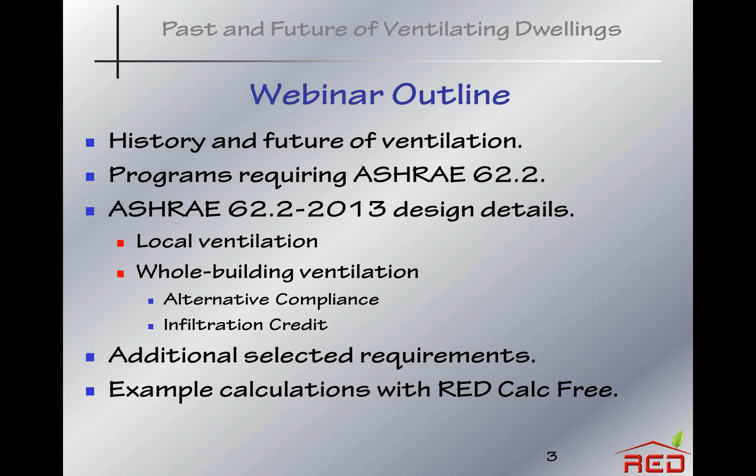A bit of history of ventilation, primarily in the United States. I love this. This is a cover, December 1931. I like it because it gives us a sense of the history, and that back then there was a great deal of controversy about ventilation.

What's the best way to ventilate? You can see by the road sign that the New York Commission was involved with this. The air conditioning industry was involved with this, developing at the time. This was a controversial issue back then, as it is today, and my guess is that it will continue to be controversial.

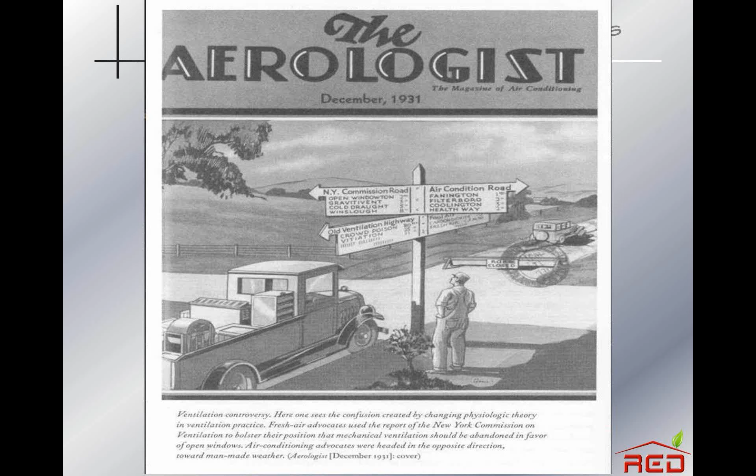Recent ventilation standards, these are all from ASHRAE, and by the way, ASHRAE stands for the American Society of Heating, Refrigerating, and Air Conditioning Engineers. The number designation given to the ventilation standard is 62. It's rather random, but that's the ventilation standard.

The 1973 version of the standard called for 5 CFM, cubic feet per minute per person, and recommended 15 to 20 cubic feet per person. In 1981, there was a continuation of 5 CFM per person.

ASHRAE 62, 1989. Now this is a significant year, as you can see from the final bullet on this slide. This is what the BPI Building Airflow Standard, the BAS, is based on. This version of the standard called for 15 CFM per person and 0.35 air changes per hour.

Some of you are probably still using this out in the field, but this will change within the next couple of months if you are following the appropriate BPI standard. I will say more about that as we move through the presentation.

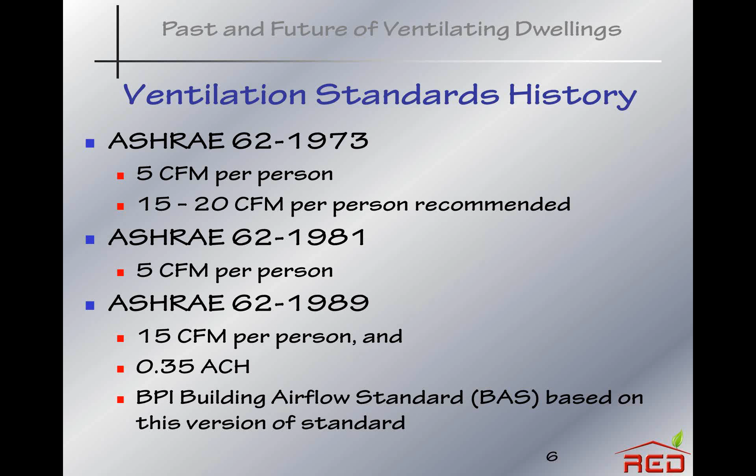There was a fairly significant change as of 2003 with the ASHRAE standard. Notice now it's 62.2. The ASHRAE numbering terminology uses a 0.2 for residential standards and a 0.1 for commercial standards.

So before 2003, it was just ASHRAE Standard 62, which covered both commercial and residential. As of 2003, the standard was split, so there's 62.1 for commercial and 62.2 for residential.

By the way, the 62.2 committee was formed in 1997 and it took quite a few years. It was a very contentious time to come up with the first version of the ASHRAE standard.

I hope you can see here the basic equation for ventilation. Residential ventilation based on the 2003 standard was 1% of the floor area plus 7.5 times the number of bedrooms plus 1. The bedrooms plus 1 is considered quite a good way to determine the number of people living in the house.

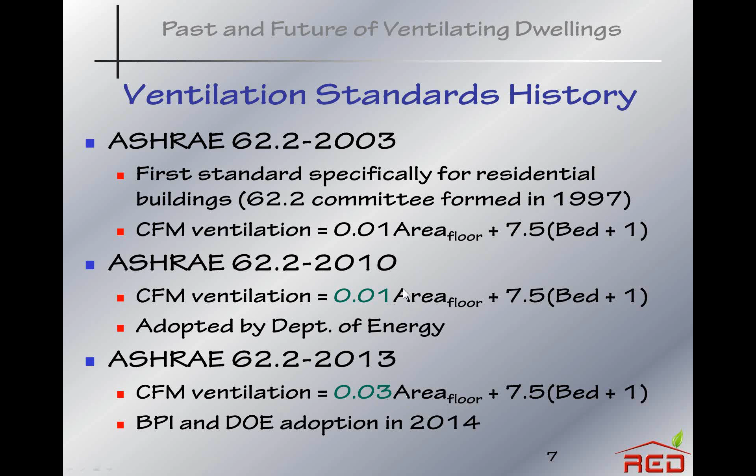The 2013 version is the most recent, and as you might be able to tell from the dates here, the ASHRAE standard is updated and reprinted in a full edition every 3 years. The next one will be 2016. The 2013 version was released just before mid-year of this year, and as you can see from the basic equation, there's a bit of a difference. Rather than 1% of the floor area, as we had with the 2010 version, it's now 3% of the floor area, because something called the default infiltration value was eliminated.

The members of the committee felt that this gave us a more level playing field for the various structures we're looking at. And you'll see in the next slide or one after that how the 2010, 2013, and 1989 standards compare.

We got another good question here. Are there studies that support the change in ventilation? And if so, are they available or could you reference them? I can't cite those studies specifically, but something the committee is doing is looking at equivalency. Another aspect is that the 62.2 standard is a continuous maintenance standard, so we must keep looking at things and making it better. I can get back to you, Bill, with an answer regarding research. I can think of one study done in California, and I can say a little bit about that on an upcoming slide because one of the major concepts is included there, but I don't recall the name of the paper - it was done at Lawrence Berkeley Laboratories.

For comparing the standards, as I mentioned a moment ago, let's look at a 2,000 square foot, two-story dwelling in Cleveland - I chose Cleveland because that's where I was born and raised - with 4 bedrooms. We'll look at it fairly tight, 1,300 CFM50 blower door test, and then we'll tighten it to 1,000 CFM50. So we're looking at it here with 2 different tightness levels. Below that, the second major bullet shows the ASHRAE whole building ventilation required.

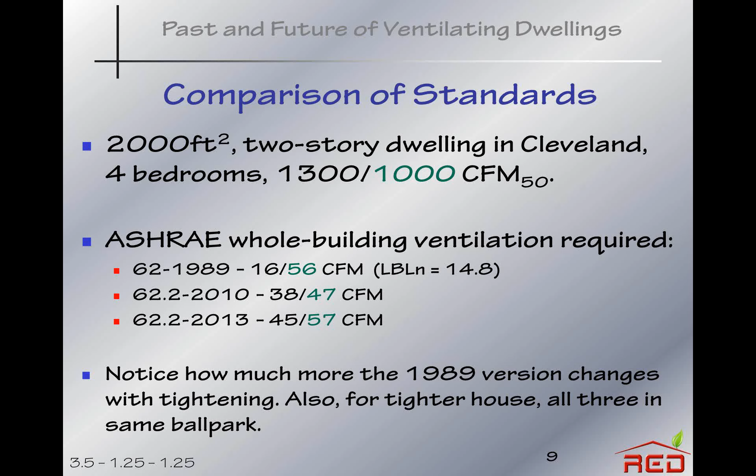For the 62-1989 standard, for a 1,300 CFM50 building, the required ventilation is 16 CFM. However, if we tighten it to 1,000 CFM50, it goes up significantly, about 3.5 times, to 56 CFM required. The 62.2-2010 standard, if we calculate that, we get 38 CFM for the 1,300 CFM50 building and 47 CFM required for the 1,000 CFM building. As we tighten the building, there's not as much of an increase - it goes up by about 25%. And the 2013 version shows 45 and 57. So the 2010 and 2013 versions are in the same ballpark, certainly - in some cases very, very close, just a few percentage points different. In other cases, they might be further apart.

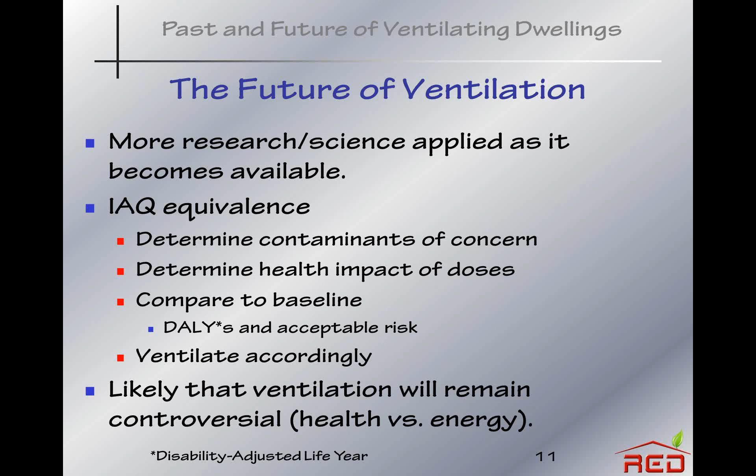This is a concept called DALYs, which stands for Disability Adjusted Life Year. If we look at a large population of people and study the indoor air quality and the way it affects them, we can see how their healthy lifetime is reduced if they're living within an environment of bad indoor air quality. It gives us the capability of quantifying the effects of good and bad indoor air quality. These studies will be done more as time goes on, and the paper I mentioned, done at Lawrence Berkeley Labs, looks at the disability adjusted life years and shows that with ventilation, people generally speaking, in the aggregate, live longer.

The indoor air quality equivalence concept is part of the 2013 standard, and that will continue in future standards. It's likely, as I've already mentioned, that ventilation will remain controversial, if for no other reason than the health versus the energy issue.

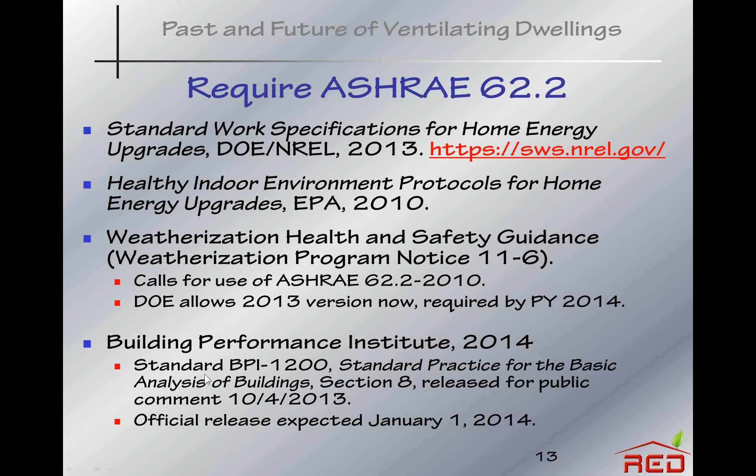EPA in 2010 published this work, Healthy Indoor Environment Protocols for Home Energy Upgrades. This includes the ASHRAE standard. There's official word from the Department of Energy that they are now requiring the 2010 version of the standard, and they will be requiring the 2013 version. Various states will have to start using that during the 2014 program year. Finally, the Building Performance Institute will, as far as I know, and this is almost official, adopt the 2013 version of the standard as of the first of next year. It is included in BPI-1200, Standard Practice for Basic Analysis of Buildings, Section 8, which was released for public comment on the 4th of this month.

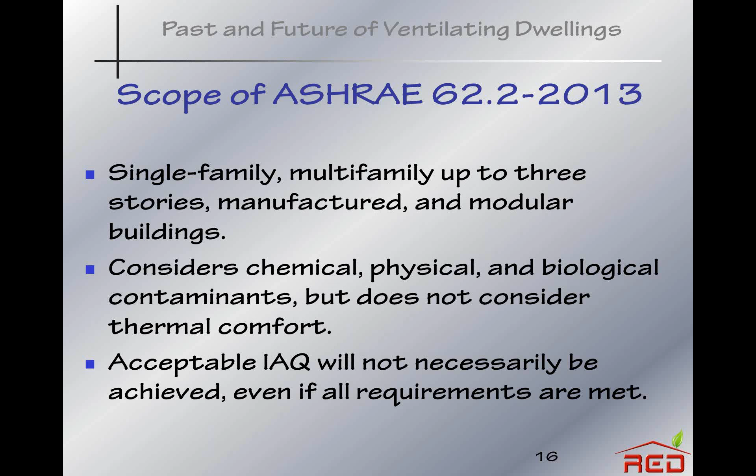It covers single-family and multifamily residences up to 3 stories above grade. If it's a 4-story building above grade, it is covered by Standard 62.1. It covers manufactured houses, mobile homes, and modular buildings. It's interesting, if you get a copy of the standard, to read the scope to see what it covers and what it does not cover.

62.2 is a continuous maintenance standard. There are many standards that ASHRAE has, but only about 20 of them are continuous maintenance standards, meaning they are always changing. As a member of the committee, this is sometimes frustrating. I sometimes get the feeling that people on the outside must think we don't know what we're doing because we keep changing the standard. We do, and I think we do know what we're doing, but there's a lot of involvement from people on the committee, and people close to the committee.

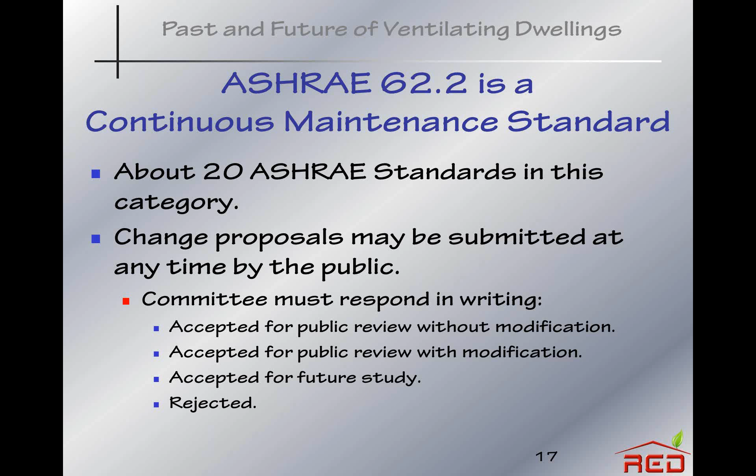Others, any of you listening, can submit a proposal, a proposed change to the standard: an addition, a change, a deletion. To do that, you go to the ASHRAE.org website, find the proposed change sheet, and submit it to the committee. The committee must review your suggested change, and then there are 4 options: we either accept it for public review without modification, we modify it, we accept it for future study, or we reject it. Those are our 4 choices when anyone submits a proposed change.

The design details of the 2013 version of the standard are what I'm going to talk about now, and I'm basing my comments on existing buildings.

First of all, it's important to keep in mind that the standard requires local ventilation. Some of you call that spot ventilation, but the word spot is nowhere in the standard. The standard uses the term local, and that is required in bathrooms and kitchens, and I will further define a bathroom very soon. Whole building ventilation is the other type of ventilation. So we have both of these required by the standard.

Local ventilation is quite easy to size properly. Whole building ventilation is more complex; the mathematics are more complex for sizing whole building ventilation. For whole building ventilation, there's the basic equation, and there's the alternative compliance part of it for existing homes, and there's an infiltration credit for existing homes also, and for new homes, but there's a limit on that.

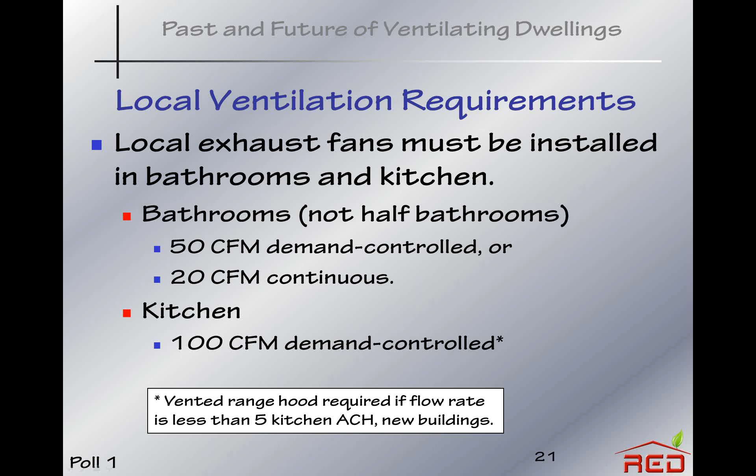Another one we've done quite a bit with in the energy field and air quality field is radon, which is a problem in many parts of the country—not all parts, but many. I would like to see BPI get into it more than they are now, but I really don't know if they will.

Okay, you can proceed. I'm going to still try ventilation. Yeah, sorry. Okay, proceed. Kitchen ventilation.

And we're starting to do studies of the capture efficiency of range hoods. There's been a lot of work done, again at Lawrence Berkeley Laboratory, on the capture efficiency of range hoods. It could be that within the next 5 to 10 years, range hoods will be rated with a capture efficiency stamped on the box. We're not there yet, but I think we are moving in that direction.

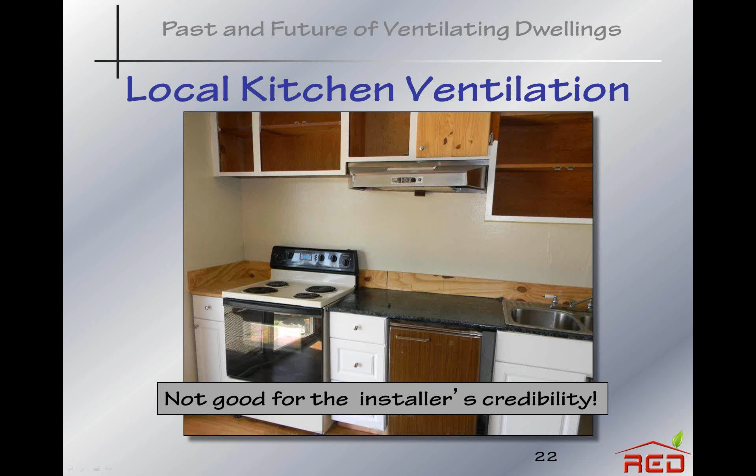And of course, the better the capture efficiency, the better the indoor air quality. As you can imagine, with a range hood, if you cook on the back burners rather than the front—say you're frying fish or something—just about any range hood will do a better job capturing those pollutants than if you cook on one of the front burners.

For existing dwellings, and I'm still talking about local ventilation in kitchens and bathrooms, a big difference between the 2007 version of the ASHRAE standard and the 2010 version is the alternative compliance path.

It was understood that it can be very expensive to go into an existing dwelling and install a kitchen range hood, bathroom fans, and a whole building fan.

So what the committee did was come up with an alternative method of complying with the local ventilation requirements, without installing or upgrading local ventilation in existing homes only.

So you may use the alternative compliance path in an existing dwelling only if there's no existing local ventilation, or if the existing local ventilation is less than the requirements of the standard—those being 50 CFM demand controlled for bathrooms and 100 CFM demand controlled in the kitchen.

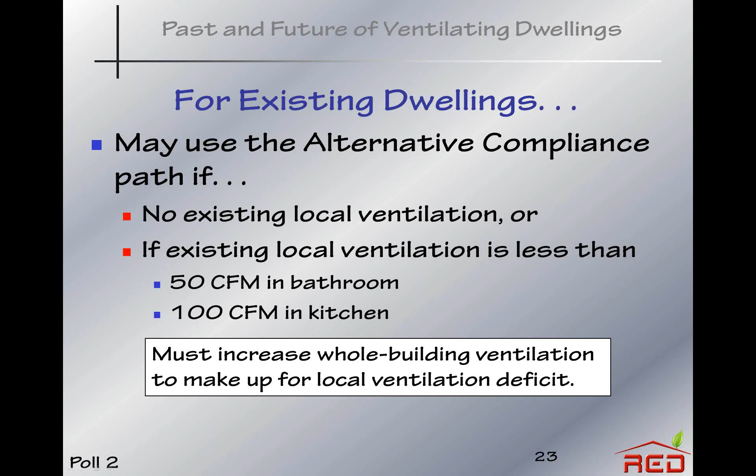Now, moving to the topic of whole building ventilation and the way this is handled in the 2013 version of the standard. Whole building ventilation has a different function than local ventilation. Whole building ventilation is to dilute the stale air in the house with fresh air from the outdoors.

There's air pollution all over a house. We carry around some of it with us on our bodies - smells, for example, carbon dioxide, other pollution, maybe from perfumes, deodorants, soaps. Furnishings can off-gas pollution, upholstered couches and chairs, carpeting and rugs. Pets generate indoor air pollution too. Whole building ventilation is intended to dilute those pollutants with fresh outdoor air.

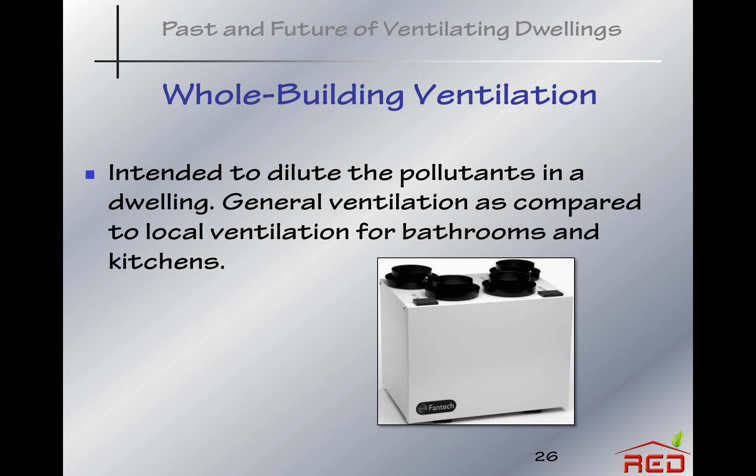The total required ventilation rate is the simple equation coming up. We add the alternative compliance supplement to that, and we subtract the infiltration credit. We get the final required mechanical ventilation rate for the whole building. We will go over that again - that slide will come up again.

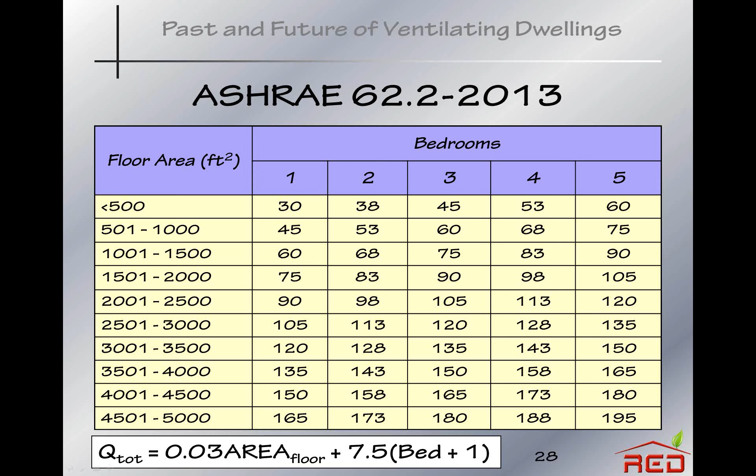This table is right out of the ASHRAE 2013 version, ASHRAE 62.2, and the equation at the bottom is the basic equation Q total. It's 3% of the floor area plus 7.5 times the number of bedrooms plus 1. I recommend when you're doing your sizing that you use this simple equation as your starting point rather than using the table. The table rounds upward in almost all cases.

The whole building ventilation requirements of the standard may be satisfied by intermittent operation. That is, the whole building fan is not required to run all the time. Indeed, it may, but it doesn't have to.

For example, let's assume you have a heat recovery ventilator, an HRV, rated at 150 CFM - that's the capacity. But the requirement for the house you're working with for whole building ventilation is 50 CFM, so that's 1/3 of an hour. So you would operate this HRV on a timer for 20 minutes out of every hour to get an average of 50 CFM. So you may handle whole building ventilation by running it intermittently.

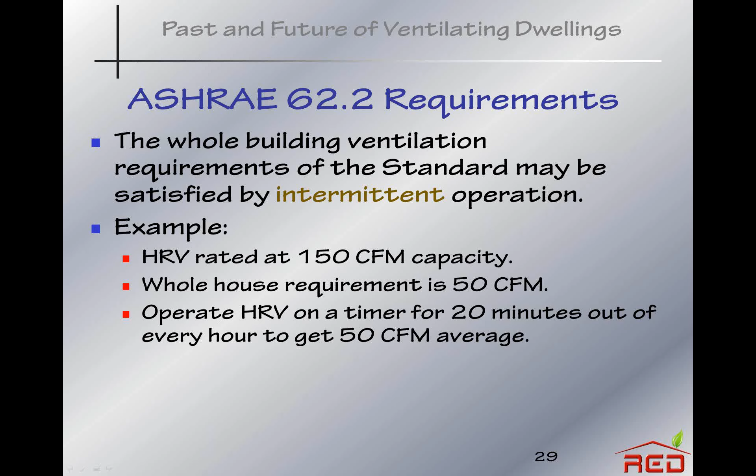And Bill, this is poll number 3 if you're ready yet. Sorry, I'm having trouble, still having trouble. I think it's a dead issue for this webinar. I apologize, okay, I'll move on then. Okay.

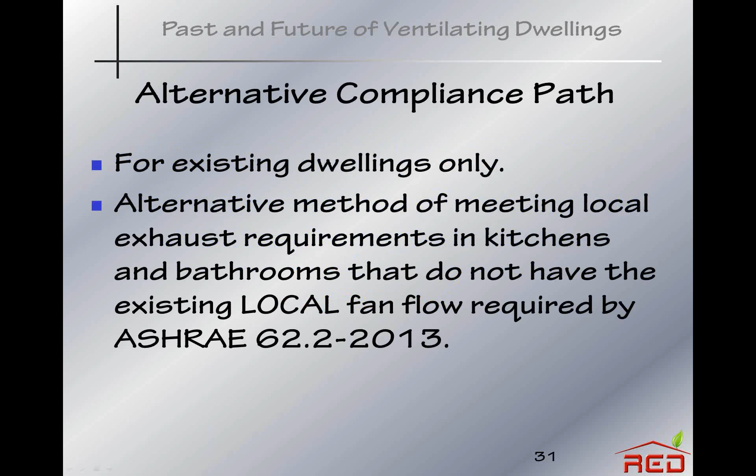Now, part of the 2010 and the 2013 versions of the standard is the alternative compliance path for existing dwellings. In both versions of the standard, this is found in Appendix A. It's for existing dwellings only - that's very important to keep in mind. And it's a way to make the standard more flexible for existing dwellings.

We'll go through this alternative compliance path. In each room where local ventilation should be, what you do is determine the deficit. We'll go through a few quick examples. If there's no fan in a bathroom, and it would be very difficult to put one in - for example, in my house, I have a very old house, and it's impossible to get ventilation in one of my bathrooms - so that bathroom has a deficit of 50.

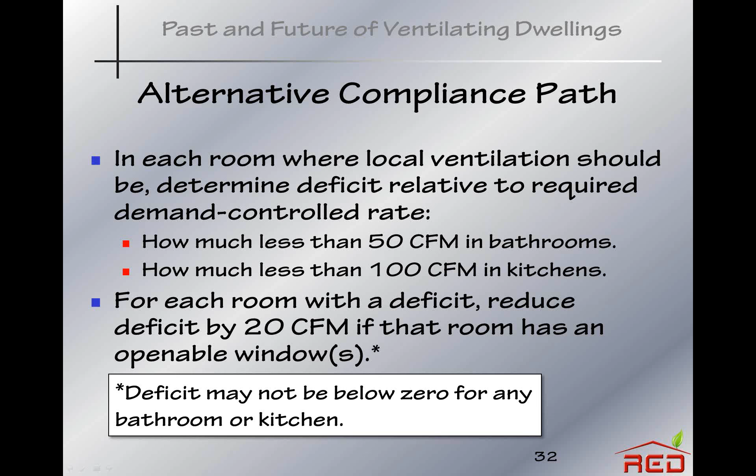Or if you go into a house and there's a fan there and you measure it - and you must measure it if you're not measuring - its actual flow rate is 37. Now you know when it comes to calculating that deficit, if the actual flow rate is 37, the deficit is 13. You do the same with the kitchen. For each bathroom or kitchen with a deficit, you can reduce the deficit by 20 CFM if that room has an openable window. It makes no difference if it has 5 openable windows or 1 - the reduction of the deficit by 20 CFM is the case. You can't take a reduction of 20 CFM for each openable window.

We'll go through this with examples. You add up all the deficits and then divide them by 4. Then you add the result to the whole building ventilation requirement. For example, if the total deficit is 100 CFM in local ventilation fans, you divide that by 4, you'd get 25.

You add that 25 CFM to the whole building ventilation requirement. For existing fans that are to be left in place, there are no sound requirements—you just keep what you have. If you're putting in new fans, there are sound requirements, which we'll look at soon. You must measure the flow of existing local fans. If you're not doing this, you better get accustomed to it if you're going to use the standard, because it is a requirement.

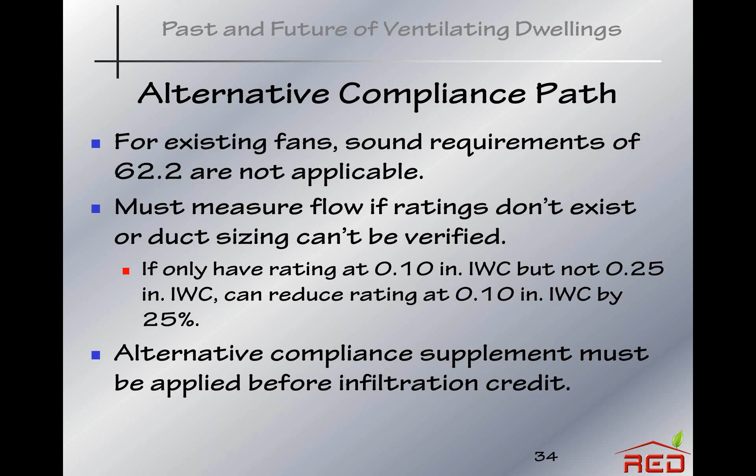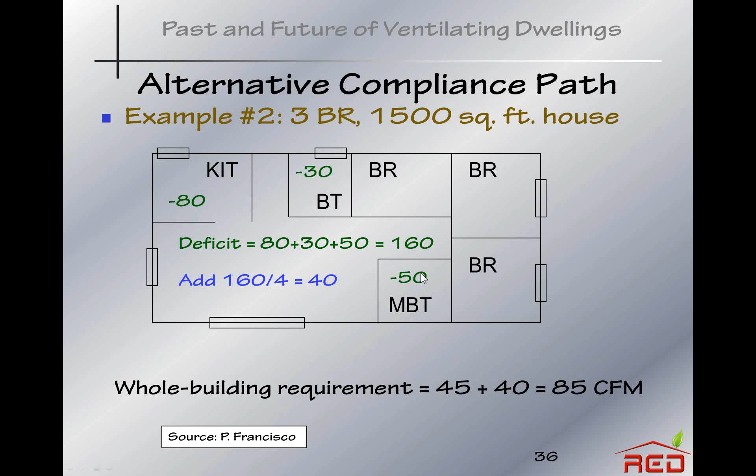Example number 2. Now we have a window in this bathroom, a window in this kitchen, a window in this bathroom, and the master bathroom remains the same. So the deficit in the kitchen is reduced by 20—it's 80. The deficit in this bathroom is reduced by 20—it's now 30. This deficit remains the same. So the total deficit is 160. We divide that by 4, we get 40. We add that to the assumed calculated whole building ventilation, and we get 85.

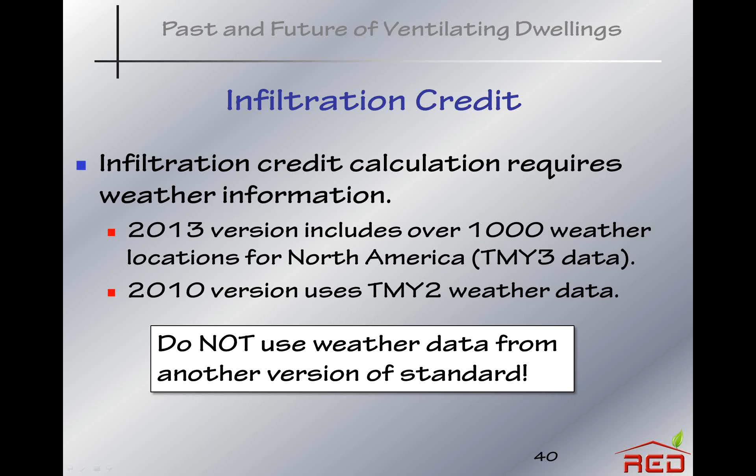There's an infiltration credit for existing and new dwellings, having to do with the tightness or looseness of the house. For the infiltration credits, you need weather factors, and something nice about the newer 2013 standard is that it includes over 1,000 weather factors. Some of you have been frustrated by the lack of weather factors—now there are 5 to 6 times more than there were with the 2010 version.

The 2013 version uses TMY3 weather data—TMY3 stands for Typical Meteorological Year 3 data. I'll show you that when we get to the RedCalc free tool.

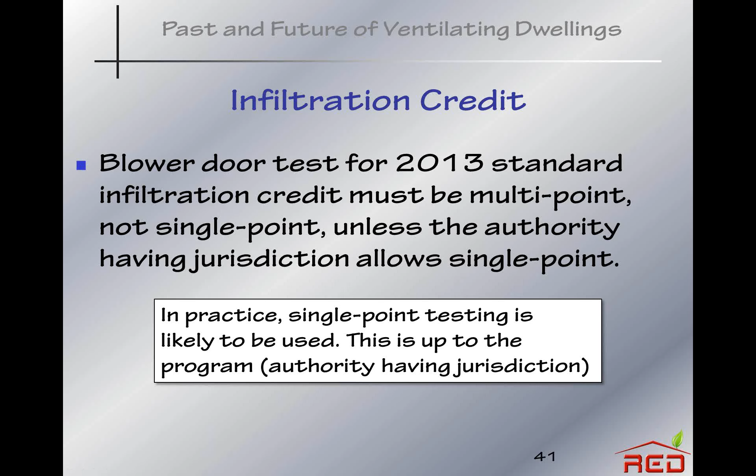To find the infiltration credits, you must do a blower door test. The standard states it must be a multi-point test, but the authority having jurisdiction may allow a single-point test. This is an issue that's a bit beyond what we have time for today, but it must be resolved. In most cases, I think people will be doing single-point tests.

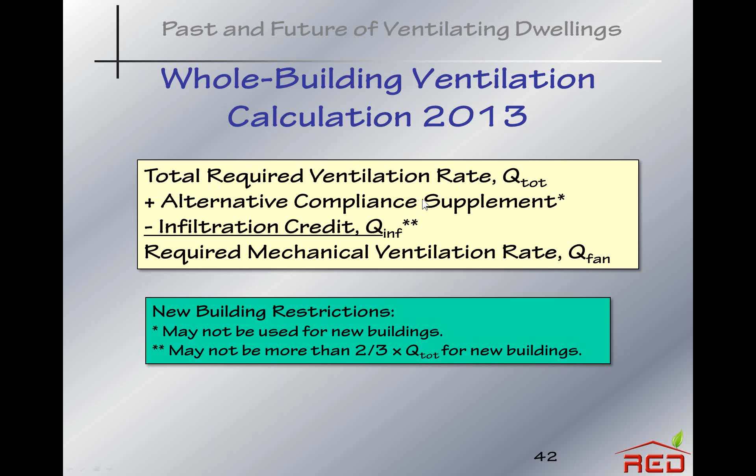You've seen this before, but this is how we calculate the whole building ventilation: the total required ventilation from the table or the simple equation, plus the alternative compliance supplement—we went over 4 examples for that—minus the infiltration credit. The math of the infiltration credit is too complex for me to show directly. Then we get the required mechanical ventilation, which is the flow rate for the whole building fan.

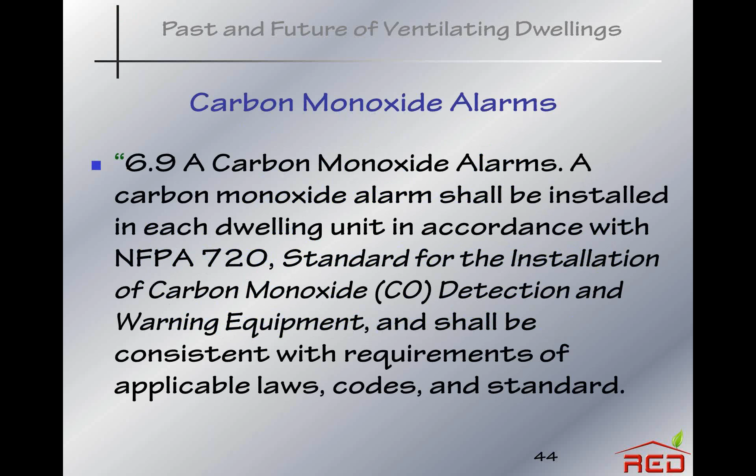Something that is added in the 2013 version of the standard is carbon monoxide alarms. Those of you in low-income weatherization working with a BPI program are already doing this most likely, so this is not new to you.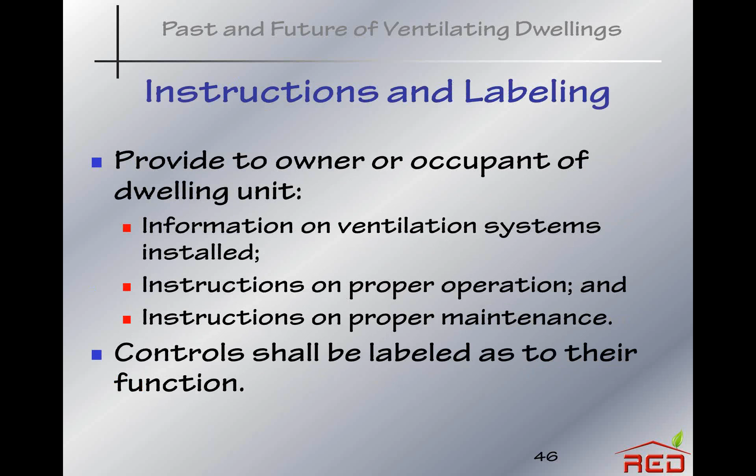Labeling and instructions is an important part of the standard. You must label the ventilation fan switch so people know what it is.

Something I think all of you have been doing with your programs is exhausting dryer air to the outdoors. This is part of the standard.

Sound ratings for fans: if you put in a new fan, either local or whole building, a new whole building fan must be 1 sone or less, and if it's a local fan, it must be 3 sones or less. If you're leaving existing fans in place, there are no sound requirements. Sone ratings can be found on most fans, but you will not find them on air handlers if you're using air handlers for ventilation, or on inline fans, which are often installed in attics. They do not have sound ratings, and that's not required.

Now we'll look at an example using the RED Calc Free software. I hope this ties the calculation procedure together for you. Before we go to the live website for that...

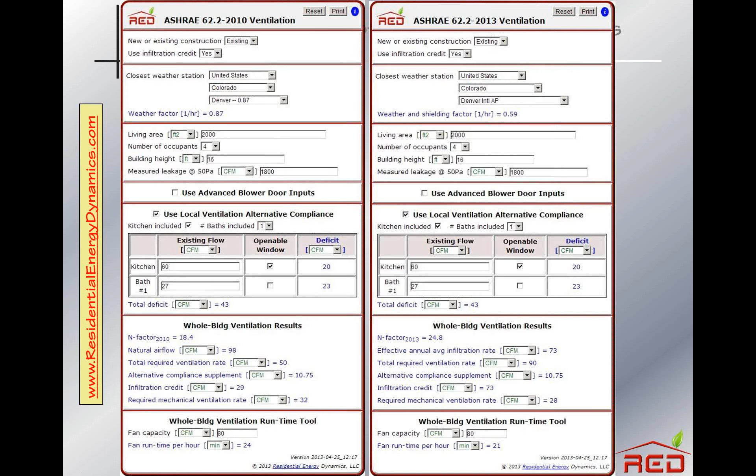So the changes are primarily under the hood. They're in the calculation procedures.

I'm going to shift now to the Residential Energy Dynamics website. This is the home page, and you can see there's a top-level menu, but also a navigation menu over here on the left, and you can go to the various tools very quickly.

We are going to use the ASHRAE 62.2-2013 tool. I want you to know that for this tool and all of the others, if you click on the i in the blue circle next to the tool name on the menu, or up here in the tool, it will take you to the user guide. Every tool has a user guide, and this gives you instructions on how to use the tool, tips, best practices, and references. It's a how-to document.

And if you're starting at the website, go to Getting Started—I highly recommend you do this first. It tells you how to use the tools, what to expect, and how to navigate the website. That's a very good place to start.

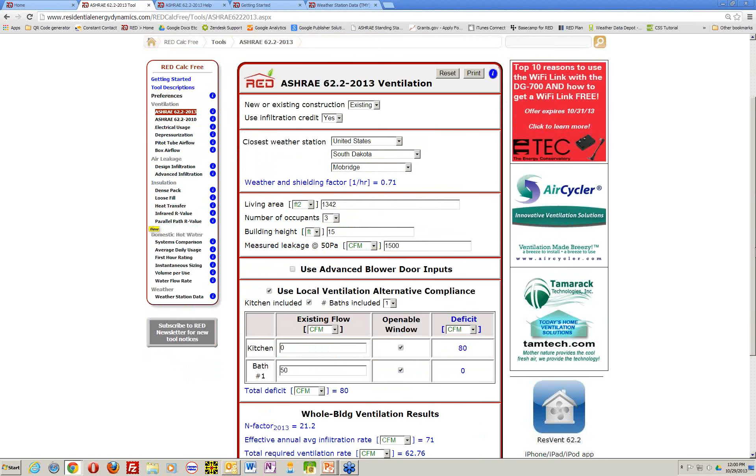Now I'm going back to the tool, the 2013 version of the tool. Scrolling down a bit here, notice that there is already data in the tool. I was talking with a fellow using it in South Dakota the other day—that's where this data is from.

I'm going to reset the tool. I'm up at the top right of the tool. I'm going to reset it, and it zeroes everything out. So now I'm going to enter data for Denver, Colorado.

Something I want to point out if you have questions about any of the labels here—for example, number of occupants—notice when I put my cursor over the label, there's a question mark. If I click it, or if you're using a touch device, you just touch it, and a pop-up tip comes up explaining what the number of occupants means, or the closest weather station. So that's always there, just a click or touch away, depending on your device.

So I'm going to start at the top and work down through the tool. We're going to do an existing building—you can see we have a choice of new or existing. And we are going to use the infiltration credit because it's to our advantage. For the closest weather station, I'm going to go to the United States, and I'm going to select the state of Colorado.

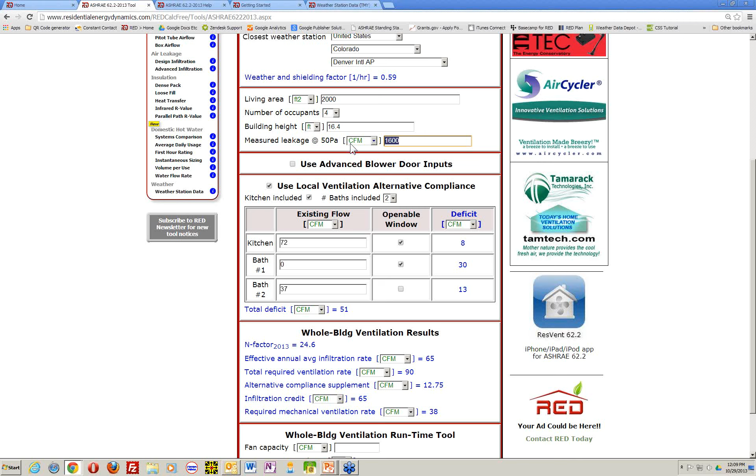...one might go ahead and include the basement in the floor area. This is open to some questions, and it's very difficult to define the living area. Something important: if you're part of a program, for example a low-income weatherization program in a particular state, the administrators of that program come up with rules for determining the living area—should the basement be included or not? Generally, crawl spaces are not included; that's an easier question. But basements can be problematic. The basement generally, in the Northeast for example, is part of the thermal pressure enclosure or envelope, but the basement is not lived in.

So should the square footage of the basement be included in the living area calculation? I can be more definitive about building height: it's only the above-grade height of the part of the building within the thermal pressure enclosure. So if there's a cathedral ceiling, the top of the height is the peak of that ceiling. Someone mentioned that if you define the building envelope, that helps with the living space definition—yes, that's true.

So we're almost down at the bottom here. Let's look at the results. Again, if you click or touch the label, there's a pop-up tip that will help you out. The N factor...

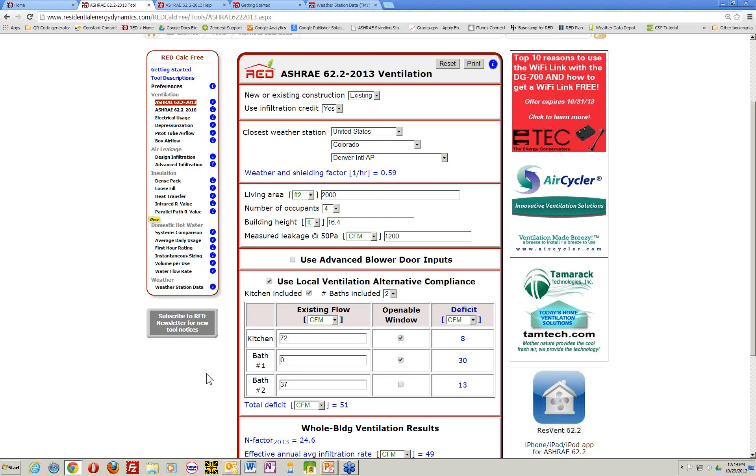One helpful comment: per the Missouri Department of Economic Development, if the basement is concrete, then it is a conditioned living space even though there are no bedrooms in that area. So there's one state definition. Yes, and that is the case in many places—the basement would be considered within the thermal pressure enclosure or envelope, and generally would be included.

Some would say—and I wish I could give a clear answer, but I must be honest, this is something the 62.2 committee has been working on—if no one is living down there, should that square footage be included? Especially if the basement is not well connected to the upstairs but is part of the thermal pressure envelope, should it be included? Because if you do include it, your ventilation rate will go up.

Let's do a quick example and say the basement is another 1,000 square feet. Let's see what happens: now we have 54, and we go up to 84 by including the basement. So you can see this can be a significant issue in places like Missouri or other places that typically have basements. It's an issue that must be thought about.

Okay, there are a lot of questions referring to implementation, as you might expect. One of them is, what if a major remodel is happening on an existing building? Do you use the existing guidance or the new guidance?

That's a good question. If it's major remodeling, this is often covered if there are codes in the state. The codes generally refer to new construction and not existing. Many states are using international codes, the package of codes like the International Energy Conservation Code or the International Building Code. There is an International Existing Building Code, and if a state has adopted that code, then often that defines what one must do if there's a significant renovation.

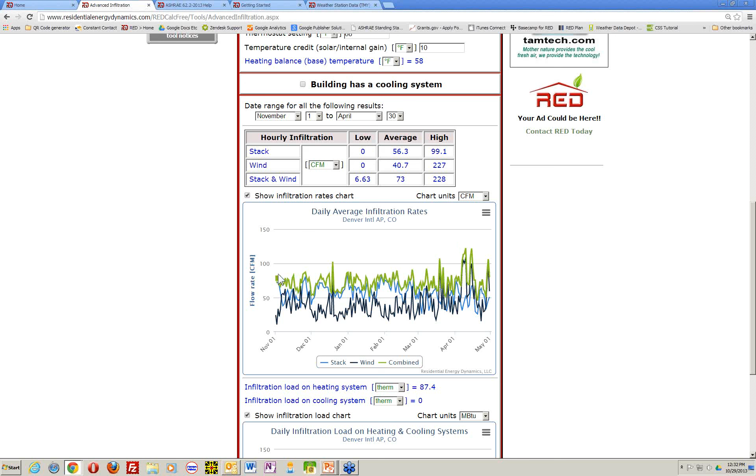Soon we will be adding ventilation to this, but now you can get some sense of what's going to happen, and you can choose the information here. It's too much for me to really explain now, but you can choose your date range, or with your touch device or computer you can select the date range on the chart, as I've just done, to zoom in on something, and I can zoom in even more, and you can look at stack effect, wind effect, and so on. This tool, the person asking the question, might check the advanced infiltration tool and the design infiltration tool to get an idea of what's happening with infiltration. And of course, attaching a fan, you could simulate that with this tool, and soon, as I said, with the advanced infiltration tool, we will include ventilation in that tool.

Okay, I have a question here, I think it's related to what we're talking about now. Are you familiar with the term SWS? I was going to ask the asker of that question. SW, yes I am. Okay, SWS has a room pressure test post-mechanical venting—is that something that's typically addressed?

SWS is the standard work specifications, and these are early on in my slide presentation—it was the first bullet on a slide, the DOE NREL SWS standard work specifications. I think there's a room-by-room test in there that if the air handler is running, it's a good idea to ensure that the pressure difference across the door is 3 pascals or fewer. I think that's what the questioner is asking about, although I'm not certain.